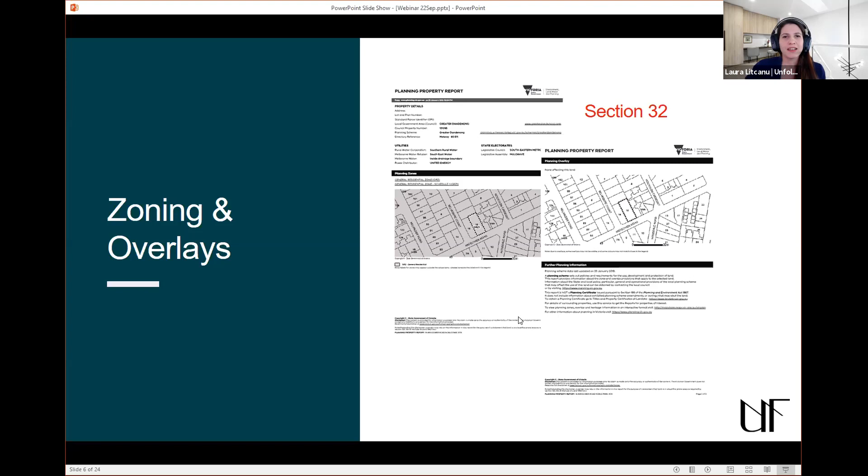About zoning and overlays, you'll see here an excerpt from a planning property report that people usually get with their Section 32 when they inquire about the land. In here, they will see the zoning, something like general residential zone, neighborhood residential zone, activity zone, green wedge zone, and similar. And they will also see any overlays that are applicable to the land. Now, sometimes the Section 32 does not include a detailed schedule to the zone and does not include more details on the overlays. So I popped in here a link that you can go to yourself and look for this information, and you can read about each of the overlays individually.

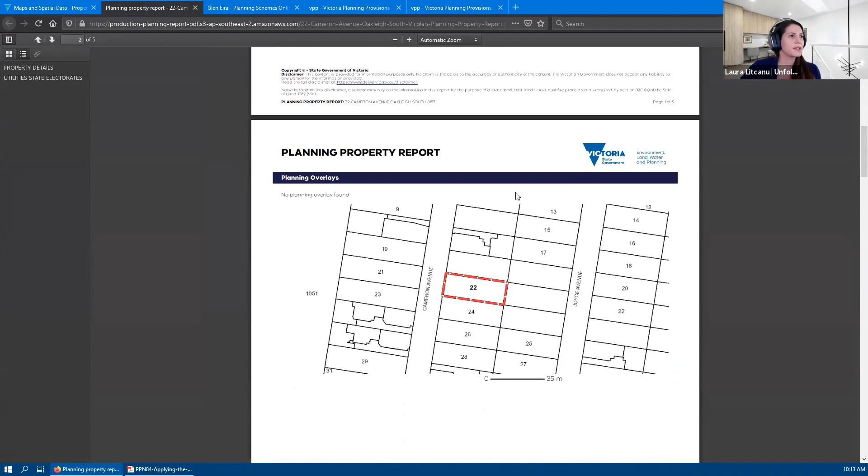I will actually share with you how that looks in case you have never seen it before. So now you should be able to see, hopefully, my other screen where I've just popped in an address, not one of my clients, a random one I popped in earlier. What you'll see in here is that you can press on Property PDF and Planning PDF. If we go to the Planning PDF, it will open exactly the planning property report that you get with the Section 32. The difference is that you get the links to actually go into more details about the schedule to the zone. And if you scroll down, you can see any overlays that are applicable. In this case, there's none.

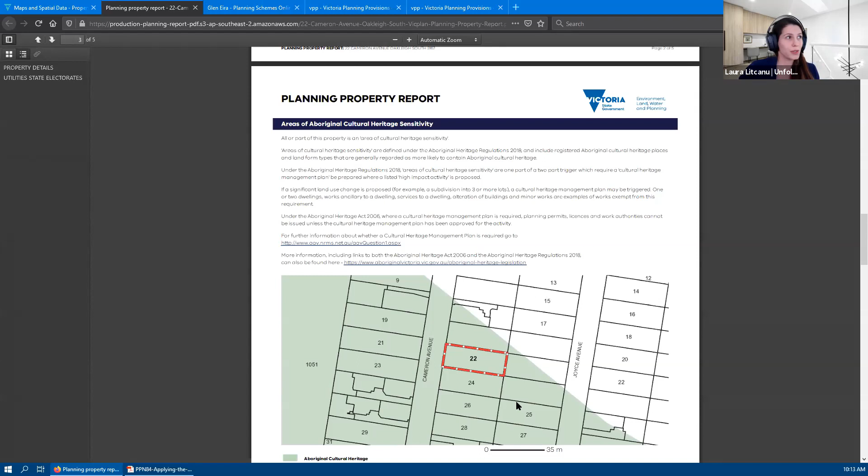For example, there's an Aboriginal cultural heritage sensitivity overlay. For less than 3 dwellings, this does not usually have an impact unless you find something while digging during construction. However, for more than 3 dwellings on a land, you may need a consultant, and you usually do, to prepare a report for you.

Now, if we want to click on this one, for example, in a schedule to the zone, we will see very specific requirements for that land. For example, in here, what we will see is that even if you want to build one dwelling on the land, if your land is between 300 and 500 square meters, and it says in here that up to 500 square meters, you will need to actually get a planning permit as well, not only a building permit. Now, this can have an impact on timing and cost of your overall exercise of building a dwelling.

If we see non-specified, that means that it goes back to the default ResCode, Residential Code of Victoria requirements. If you would like to read more and you don't know what that is, you can just search and you will find some information in there. Now, when you read this one, if you see A for standards, it refers to one dwelling on a lot, whereas if you see B, it refers to a multi-unit development. If the land has already been subdivided and someone wants to build something on that vacant lot, we're looking at one dwelling on a lot because the land is already subdivided.

Now, some different requirements in this particular case that we're looking at is that the front setback is varied from the standard ResCode. And then we'll see if someone wants to build unit developments, they have specific requirements for the area of secluded private open space. Now, I don't want to go into too many details about this particular one because we could talk for hours. But as I said, happy to discuss more with you if you have a particular case that you would like to discuss.

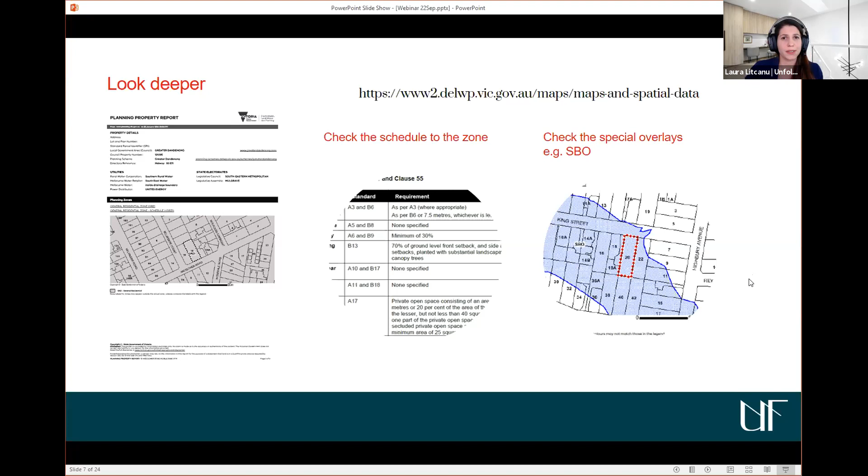Covenants. This is a very interesting one because you could find out things you did not expect before. What is a covenant? For those who don't know, it is a restriction put on the title. Now, in estates, for example, if the estate has been designed to certain regulations, there could be a covenant that says you need to get approval from a committee before you develop anything. So you actually don't need to go through council, but you have to comply with certain guidelines. There are covenants that refer to the fact that you can't dig for a quarry on the land, and those do not usually create any problem for development. They're very old, done in olden days, how my kids like to call it, but they don't have an impact on your development.

There are others, however, that have a big impact on your plans, and one that I see quite often is the fact that you can't build more than one dwelling on a land. When I know there might be a covenant like that when I see an ad, and I get some developers that are actually asking me to have a look at lands before they purchase.

And sometimes when I see a land that looks like a good land for unit development, but the real estate ad does not say subject to council approval unit development, I know there must be a covenant in place. If they only refer to one dwelling or extensions or your dream home, keep existing, build new, it usually means that they have a covenant that stops them from developing more units.

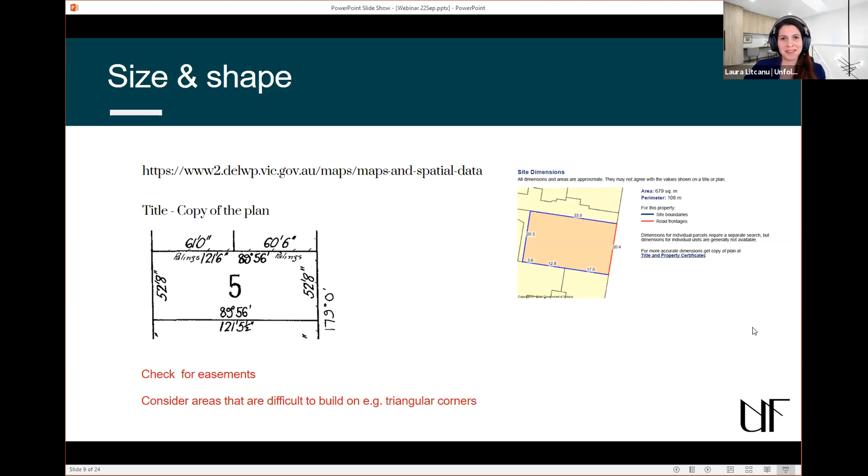If you don't see easements on the land, it does not mean that you don't have pipes. This is one mistake that I've seen even designers make, and I will go through it in one of my next slides: not to check if there are actually pipes that do not have an easement created. Because if they're there and if they belong to someone else, such as a water authority, they will still trigger certain restrictions on your land, and you can't find out unless you order some documents that I will go through later. So don't trust just the size. Have a look at the shape as well and easements.

Solar orientation. Why I'm saying this is a big one, it's not only for the well-being, but it also impacts what you can do on the site. Now, for those of you who might not be aware of this or might have some misconceptions around it, in Australia, as opposed to the Northern Hemisphere, north is actually the best orientation because it gets natural light throughout the day. Now, the southern side is the one that will get no direct light throughout the day, but it gets a good indirect light. Southern orientation might be good for studies, for example, where you don't want that glare to come into your screen.

Now, why is north important and why is it important to understand where north is? It's because the southern part will be the one that will be in the shade most of the time. And we definitely don't want our backyards, our living areas to be in the shade. They will feel bad and they will become moldy in time.

If someone talks about a site that has northern orientation, that does not mean that the street is facing north. That means that the backyard is facing north. I see a lot of people looking at this for the first time and misunderstanding it. So when you hear something is south-oriented, it means that the backyard is facing south. If you hear it's north-oriented, it means that the backyard is facing north.

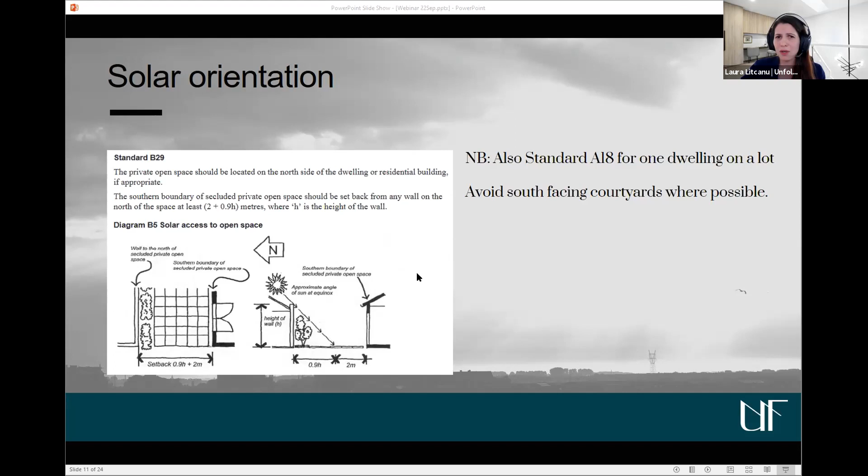And this is one outcome that you can get if you don't check the solar orientation of your site. Even if you want to build an off-the-shelf design, try to overlay that on the land and look at how the spaces will be oriented so that you can understand which one will be overheated, which one will get enough natural light, and which one will not.

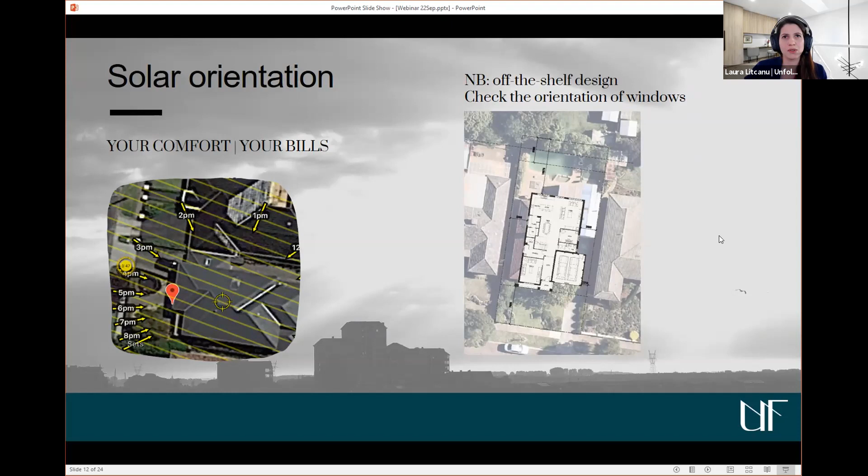Constraints above ground. Trees. Trees are a big one for some clients. I'm a big lover of nature, and I do encourage people to keep them wherever they can, because nature does contribute to our well-being. It's proven that it does. However, there could be cases where, due to the nature of the trees, if they're weed species or if they're in poor condition, they need to be cut as well.

My advice, if the trees are on your land, check before you cut if you really need to cut. So if you know what you want to do on the land, have a look if that tree can be maintained, and check if you need a permit. Now, Glen Eira is one of the councils, for example, where you don't need a permit to cut a tree. And I've seen a lot of people just chop trees randomly because it's easier to have a clear land. But the majority of the councils do require a permit.

It's easier if you apply for the permit together with an application for what you're planning to do, or at least showing why you need to cut that tree, because you then have arguments why that tree needs to be cut.

Now, if it is a tree of a council or a neighbor's, you do need to consult with an arborist, or it's advisable to consult with an arborist. And there are two abbreviations here that you will see, TPZ and SRZ. TPZ refers to the tree protection zone, and SRZ refers to the structural root zone. These are areas that you need to consider.

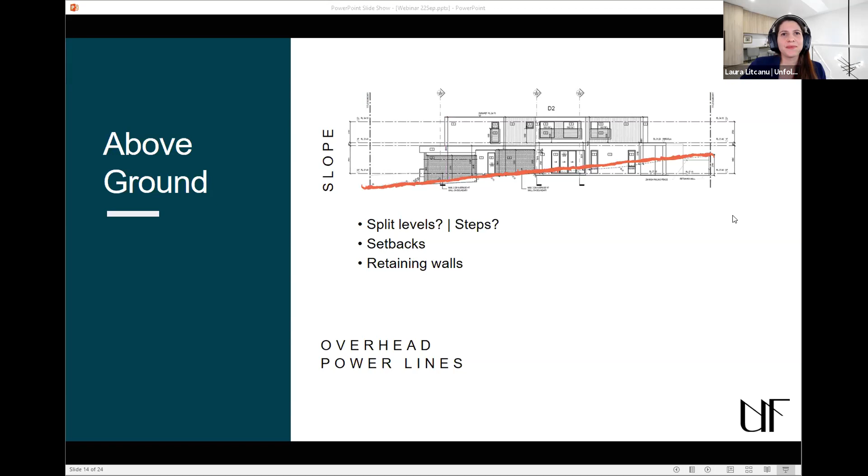Now, underground, and this is the one that I mentioned is quite important. The dial before you dig is the website or the documents that I would like everyone to order when they are looking at their land. It's free of charge, and it will give you approximate information on any pipes that might be on your land, even if there's no easement.

So if you go to 1100.com.au or you search dial before you dig, you will be able to create an account and order. You'll start getting a lot of emails with documents. Have a look at the ones that come from council and have assets, and have a look at the ones that come from the water authority, and scroll down, have a look at all the pipes. If you aren't sure, seek help, because this is very, very important, checking the pipes.

I know we're going a bit over time because we didn't start on time, so hopefully everyone can still stay back.

I wanted to show you quickly one case that I had on a project, and explain why I think it is important. Okay, so right now you should be able to see a floor plan, and I will show you the pipe at the back. The client initially had some design done by a building designer. It was okay, except that they did not consider anything about the pipes at the end.

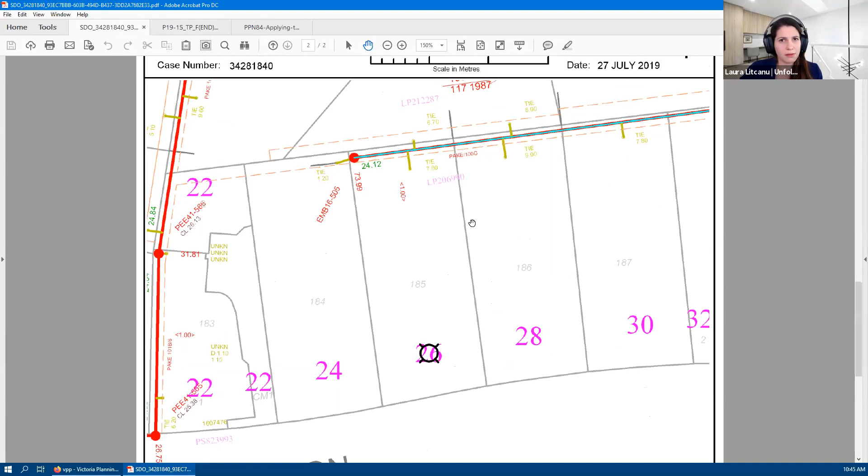And what we see in here is not only a sewer to the back, but we also can see a connection branch that could be moved if you have where to move it, and you can apply for it. It does incur costs. However, in our design of the unit at the rear, we made sure that we actually set back from it from the beginning. We proposed the decking with the possibility of checking, and that we could obtain the build over approval.

So we avoided actually having to amend this connection branch to change it. We avoided the additional costs, and we knew what pipes we have in there by checking all these documents. Why am I saying dial before you dig as opposed to ordering the pipes directly from the authorities? It's because it's free. So pretty much that's the main reason. It is free.

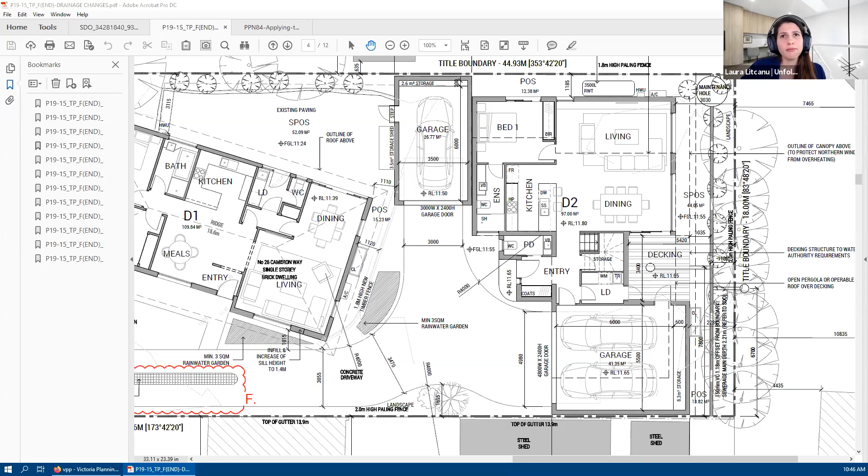Sorry, I'm just trying to go back to my usual screen. Okay, so hopefully you should see my main screen right now.

The other documents, the sewer depth offset, SDO, and property sewerage plan can be ordered from the water authority, but they do cost money, as well as the soil report. Yes, this can impact the construction cost and the details. However, you wouldn't do that before you purchase the land. With the soil, what you can have a look at is if you see there are a lot of infiltrations of water, you will know there are issues with the soil on that land.

Now, I'll quickly go through the next slides because there's quite a bit to talk about, and I don't want to go into too many details. I'm conscious of time. With the surroundings, one thing that I wanted to say is that if you see something built in the area and you want to do the same, it does not mean that you can do the same. There are quite a few regulations that have changed in time, and one big one was in March 2017 with the garden area requirements.

And the solar orientation can have an impact on what you can do as well. In here, you'll see an example of what a client of mine wanted to do and thought she can do, but we ended up with something different because it wasn't applicable on her side.

Now, if you want to get more certainty, there's Nearmap. That is a paid subscription. I think the cheapest one is 1900 per year. Not worth paying if you're doing a one-off check, but worth exploring if your job involves checking sites in more detail.

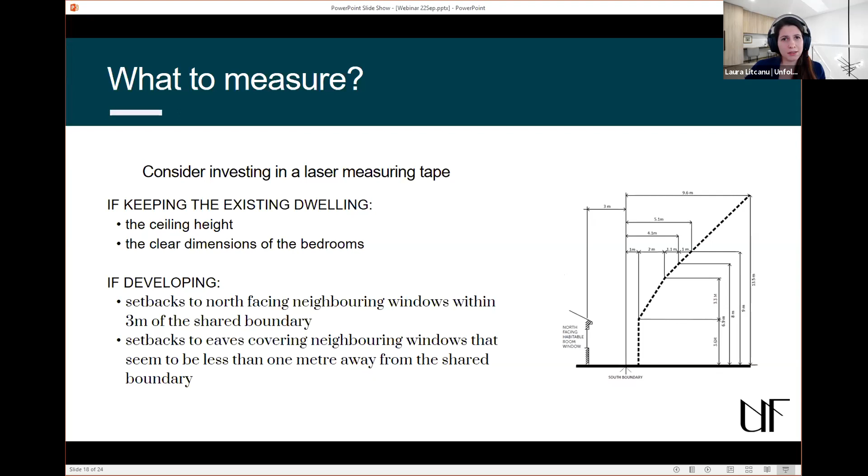Setbacks to eaves covering neighboring windows. If you have a neighboring window that's super close to the boundary and they have an eave on top of that, and the distance between the eave and the boundary is less than 1 meter, that will mean you can't build on that boundary because you have to allow some space clear to the sky. So remember, between the eave and the boundary, less than 1 meter clear to the sky, you need to give that space on your land for them.

If you want to keep the existing and subdivide, think about not necessarily being able to allow for two crossings. You might need to move a wall sometimes to create a 3 meter driveway. If that is less, I've seen councils insisting on that, even for 200 millimeters. Have a look at setbacks, number of car parking spaces. It's a feasibility study that can be done in quite a quick amount of time, probably an hour or sometimes less, if you do want to engage a professional to have a look for you, just to avoid buying a land that cannot be subdivided so easily.

Will you need a permit? Well, why is it important to know? Because it will impact the cost and timing. How can you find out? Calling councils, looking for professional advice, and checking planning controls yourself if you're more experienced in it.

Question mark when you see STCA, subject to council approval. Don't always believe what you see. I've seen a lot of cases where people get burned by believing it's possible. What I do advise people is to get some over-the-counter feedback from council, meaning calling them or going there when visits are possible. That's before purchasing the land. However, the most certainty you can get is by applying for pre-application advice, but that is a more costly exercise and probably something you want to do after you pay the deposit and secure the land.